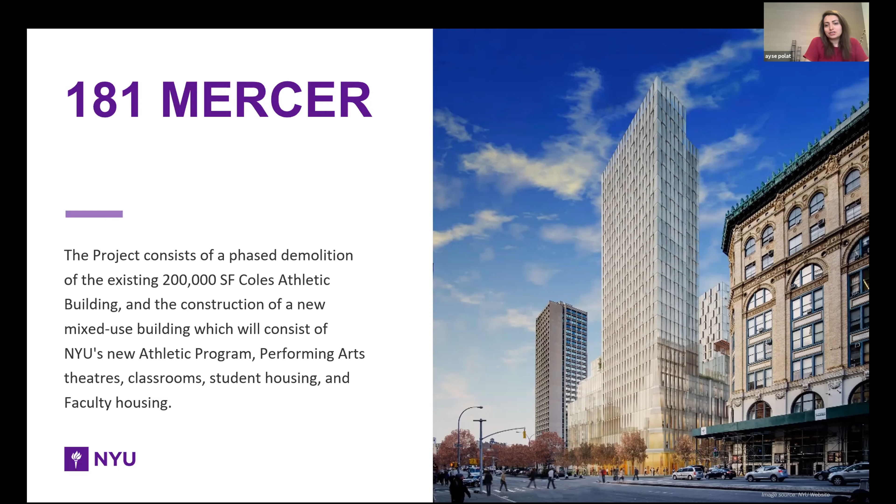So let's talk about NYU Mercer. It's a very unique project because of its scale and location in the heart of NYU. The project consists of a phased demolition of the existing Coles Athletic Building and the construction of a new mixed-use building, which will include some athletic programs, performing arts, theater, classrooms, and student and faculty housing.

So currently in 2020, work performed was very busy: structural steel, precast planks, cast-in-place concrete, a lot of completion of spray-on fireproofing, curtain wall installation, and delivery of major MEP equipment. It was really a very busy year for the project in 2020.

So some metrics from the project. As I mentioned before, it's a large scale project. It's a mixed-use academic building, 750,000 square feet, 23 floors. Area per floor varies according to podium and towers, and it's a GMP contract type, guaranteed maximum price.

It was really exciting to work with all these different companies and learn their expertise in their specific fields. We spent a good amount of time with a select few of them during the BIM process and doing coordination of this building—a lot of time with the architects, Davis Brody, Kieran Timberlake, and the MEP engineers over at BR+A. They were integral to this whole process, and I like to think that we showed them the Turner way to coordinate a building, so hopefully they take some of these procedures and skills to their next project.

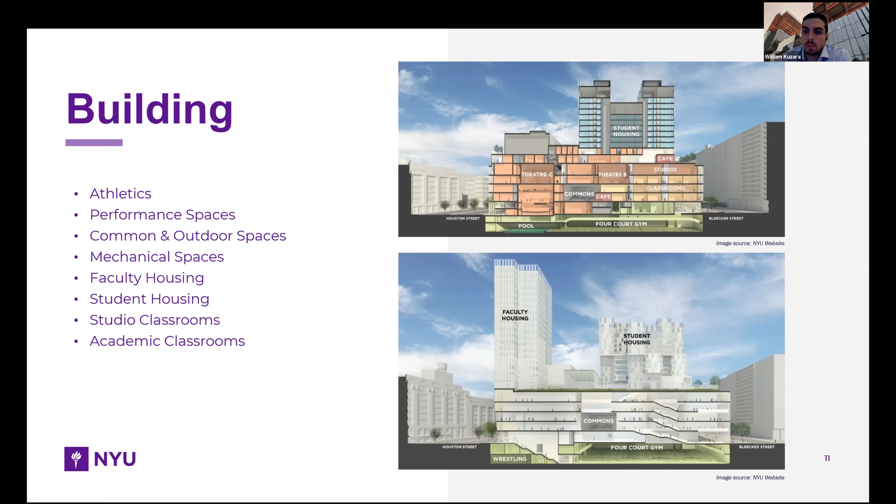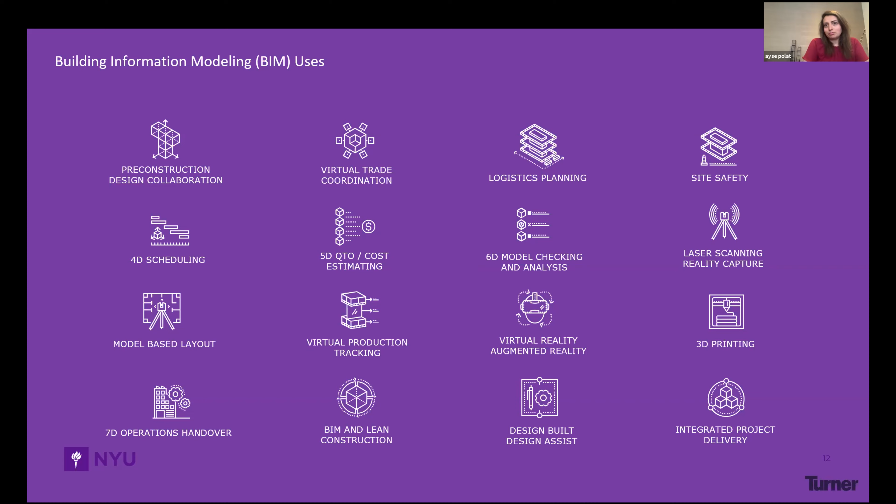So let's talk about the BIM part of the project. Of course, the project is very large scale, with a lot of mixed uses. In any building information modeling, BIM uses can be performed on a construction site, and these technologies are, year by year, increasing and advancing. So you see some of the BIM uses that we currently have on the screen.

On typical job sites, some or most of these are being used. But for this project, we actually did virtual trade coordination, logistics and safety planning, 5D, 6D, laser scanning, model-based layout, virtual production tracking, 3D printing, and lean and BIM integration. In the following slides, you will see samples of these, and these BIM uses are actively used in the project currently.

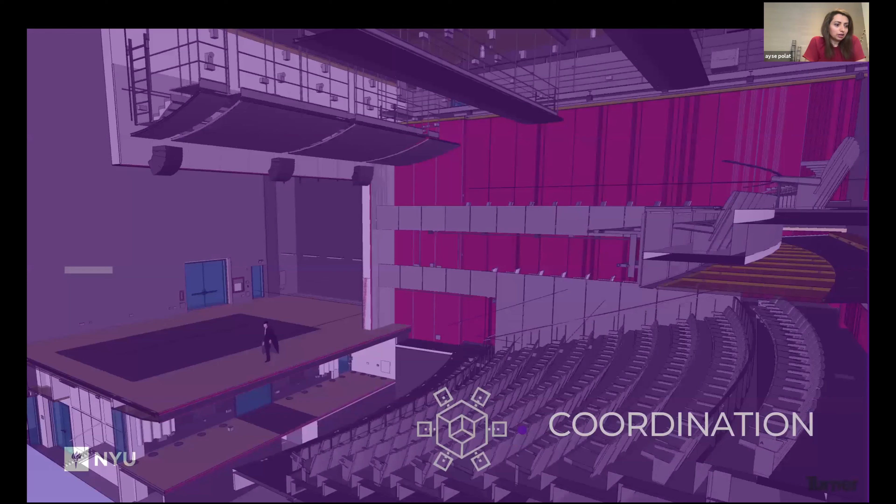We will start first with coordination, because coordination is probably one of the most important BIM activities on the construction site. Bill, since he has been involved with the project since the beginning, will explain the coordination setup. But first, Sal is going to mention how the coordination was set up contractually and in the BIM execution plan.

Okay, I'll go through a few of the things we did prior to coordination and setting up for the project. There's many facets to setting up BIM on a project. Initially, we usually start off with a BIM execution plan, which we did on this project, and we meet with the project team. We discuss the project, learn about it, and decide as a team what uses we want to implement on the job.

From there, we'll start getting into setting up contracts with subcontractors. You can also refer to them as requirements for the subcontractors. We want to ensure the subcontractors give us the deliverables required for the project. It's also a way to hold subcontractors accountable. This is put into their contracts, and it's something that's owed to us, so we're very diligent on that portion.

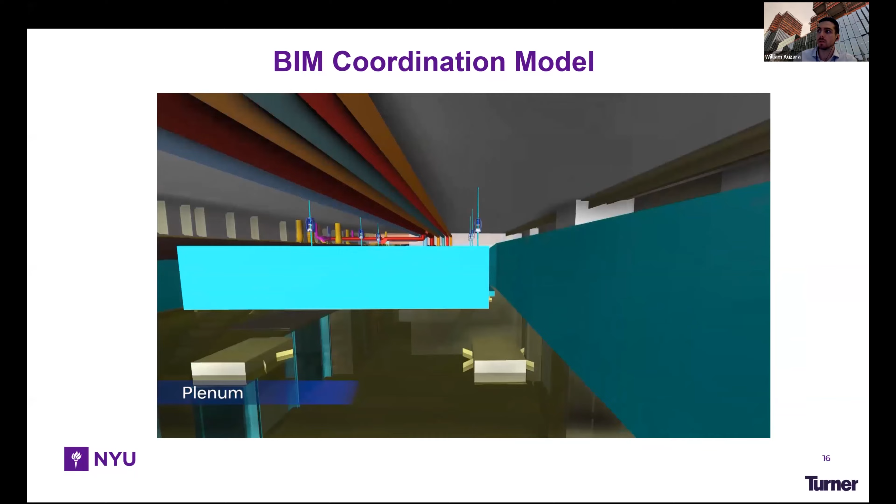Thank you, Sal. Schedule is very critical to BIM coordination. We basically need to be ready to build the building when out in the field is ready for us to install the MEPs. So the video you're seeing on screen is a walkthrough of a live coordination model after we finished coordinating it. This is the final product of BIM coordination, where we put together the building in 3D before we actually build it, so that it's buildable in a timely manner when we get to the field.

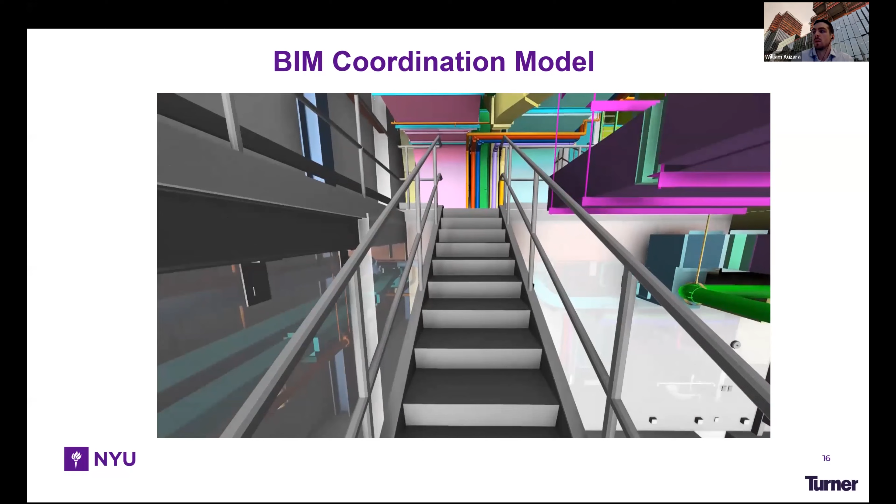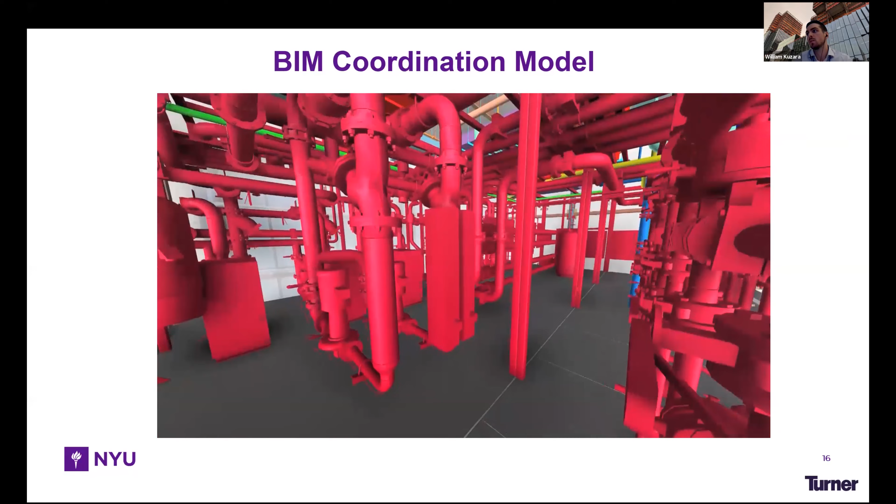One of my favorite things about BIM and utilizing it as a tool is it really makes me feel like a superhero, because it gives me X-ray vision. I can see through walls, change through colors, walk through walls, and really get a feel for how the building is going to be built when it's done, and also how it gets put together. I'm going to let this video loop and start it over, walking you through the specifics - this is on the south side of the building.

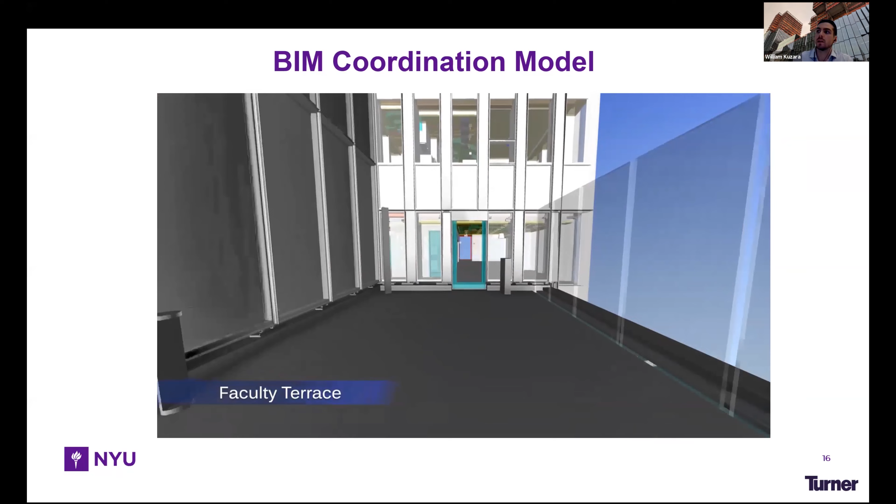There's a terrace for the faculty housing. It's really cool that you get to see, pop your head above the ceiling, what you're not going to see when the space is finished.

So it takes us a lot of time to really make sure everything's fitting and we can build it without hitting each other once we're out in the field.

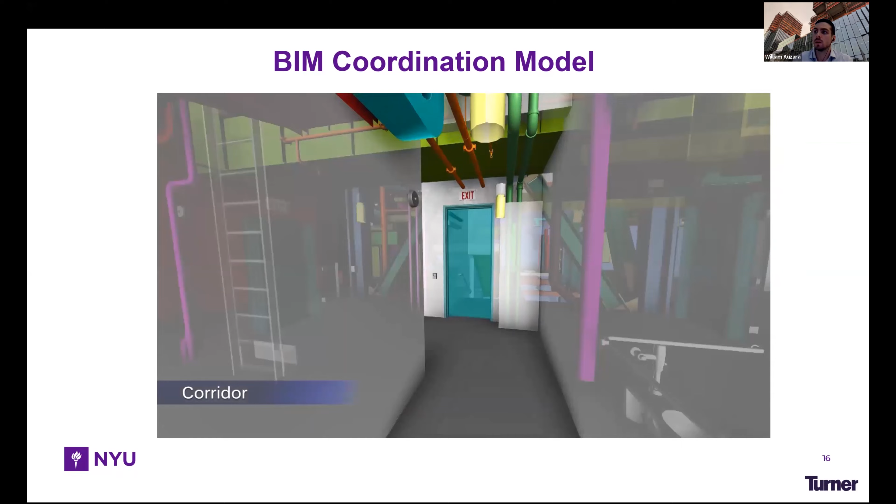So this is more of a finished space, but then we walk into a back of house area where our mechanical room, one of our biggest mechanical rooms on the job, is. We're actually building this out in the field right now, and we really used BIM to put this together in 3D before we build it.

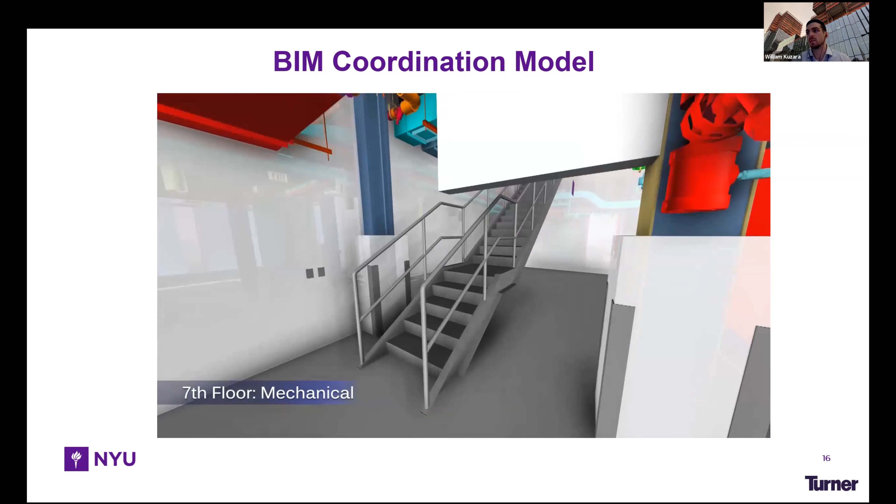You can see it's a very complex space with a lot of layers. It took a lot of time to figure out where everything was going.

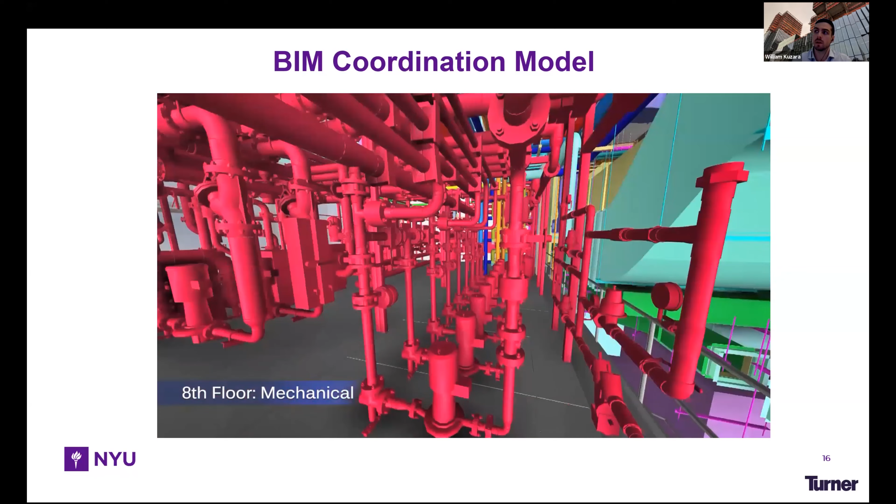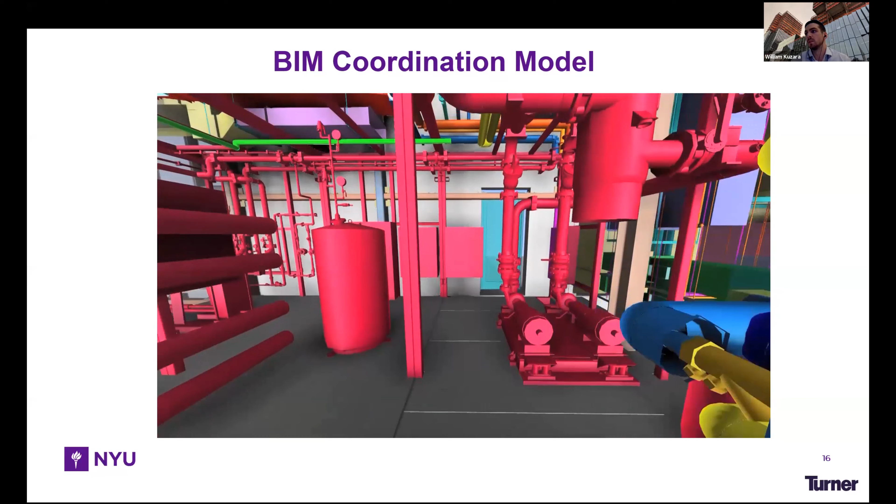One of the most important parts of this mechanical room is this prefabricated mechanical skid. Everything in red you're seeing was shipped to the site in just 3 pieces, 3 large pieces that were picked by the crane and set onto this mezzanine here. So it was a highlight of our MEP systems, that prefabricated skid.

So this next slide is kind of the other side of the coordination coin, whereas the first video was a typical MEP coordination mechanical room. The video looping now is an example of one of the many unique and challenging coordination spaces of NYU Mercer, this being the biggest theater, the proscenium theater on the job.

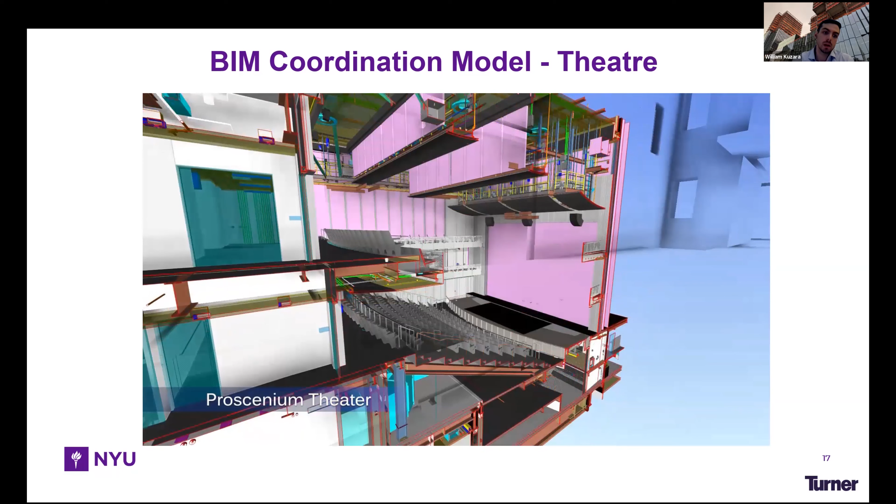What's important to highlight about this space is we didn't just have our standard MEP coordination, but we had a lot of high-end finishes from the millwork side, the architectural side, the theater rigging side, and the AV side. So there's a lot more than just your standard MEP coordination in these spaces.

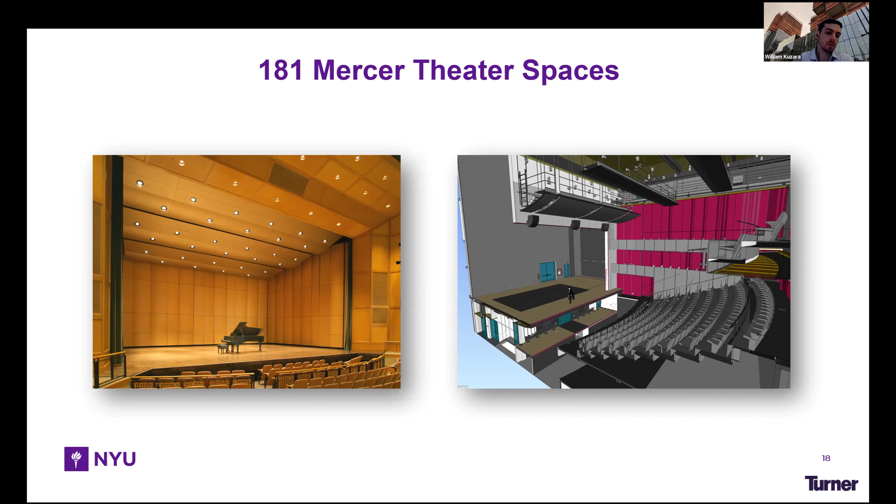So when you're coordinating a space you're not familiar with, you have to reach out to all your resources available to make sure you're coordinating it correctly, so you understand what it's actually going to look like and how it gets built.

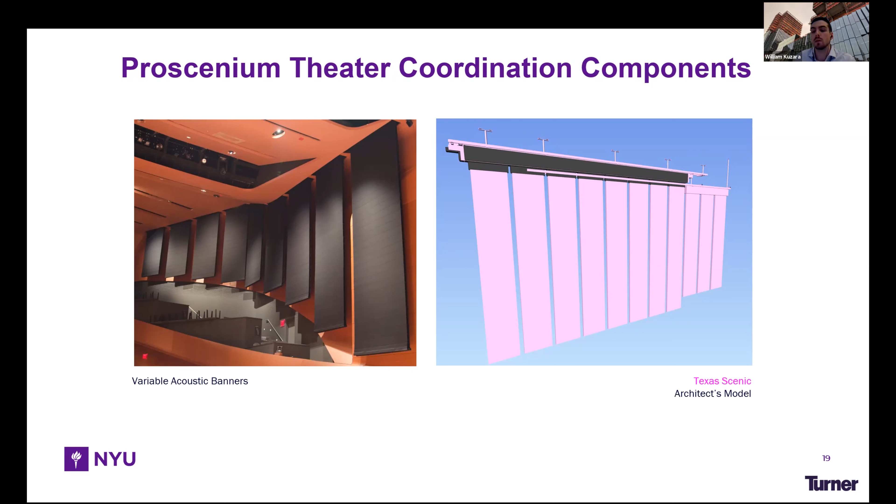What you see in pink is basically what's being fabricated and installed in one of our theaters. It was challenging because we had to rely on our subcontractor to explain and provide a detailed model of not only what the housing looked like, but all the supports and what it was actually going to look like when deployed, to make sure we were clear of everything around these acoustic banners.

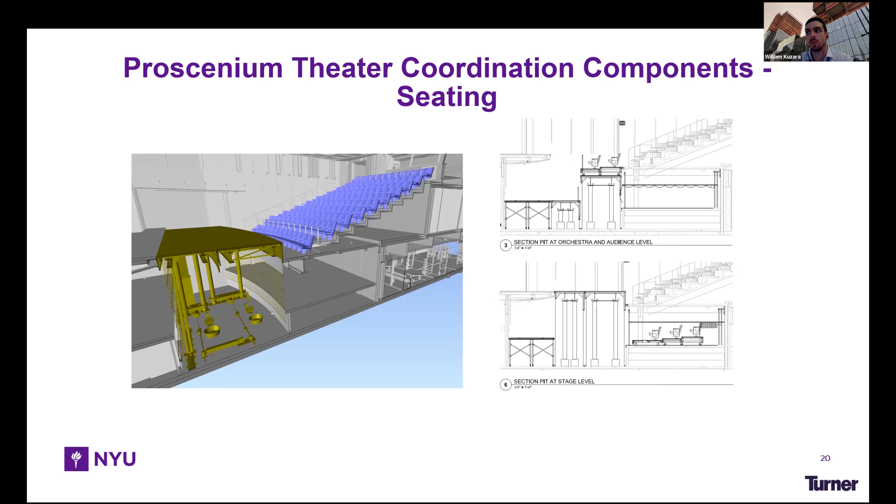We got the model on the left from our subcontractor, and he was able to put it into the model. It's a very detailed model that really helped me understand how things moved around and make sure we were allocating enough space for this lift to go in.

One of the more challenging parts of the big theater was the overall seating rake, where we have the majority of the seats. It's a sealed concrete plenum, a mechanical plenum, so underneath we have a large system of ductwork pumping air into basically an open void. Under most seats there's a cylindrical air diffuser that slowly diffuses the conditioned air from below up to under your seat without your noticing it.

One thing we used BIM to coordinate heavily in this area was pulling all the different models together to see the whole picture: the seating location, the diffuser locations, the structural standpoint with the support steel below, and the masonry walls forming our concrete plenum on the sides. The coordination model was really a tool for us to see everything in one spot and make any adjustments required due to conflicts with steel or how we were fitting in the electrical devices for the seating lights. It was the best place for us to bring everything together and look at it as an entire picture.

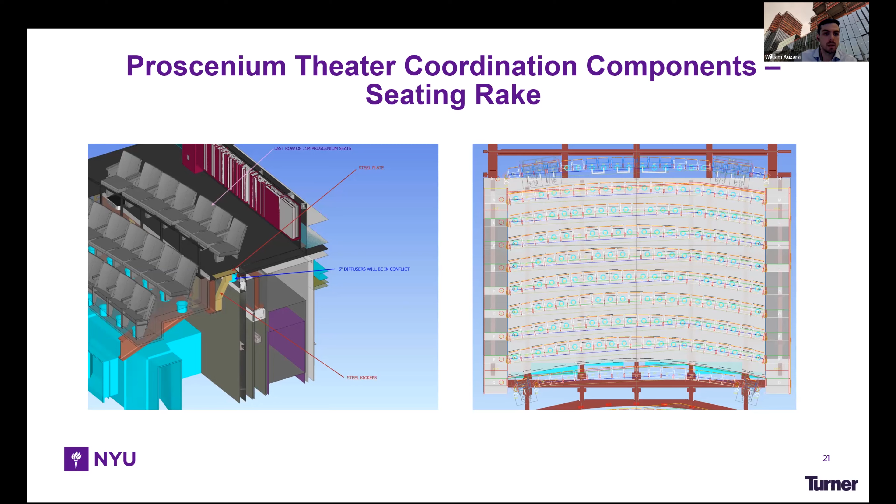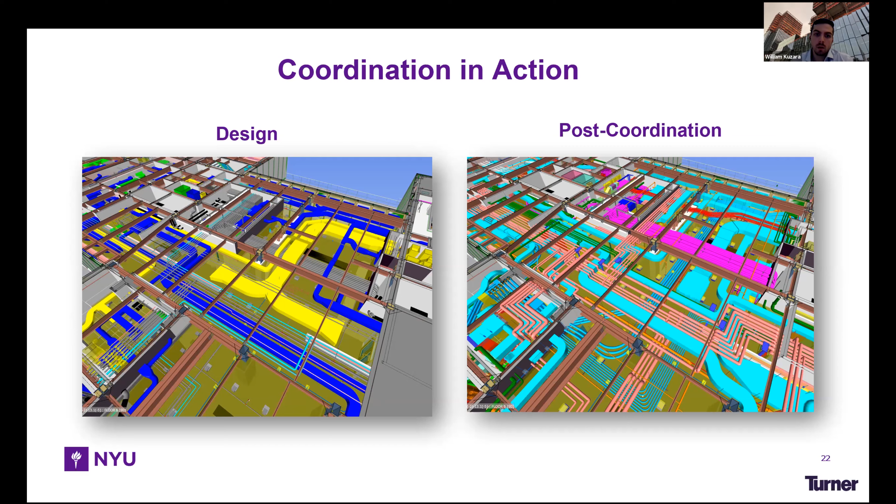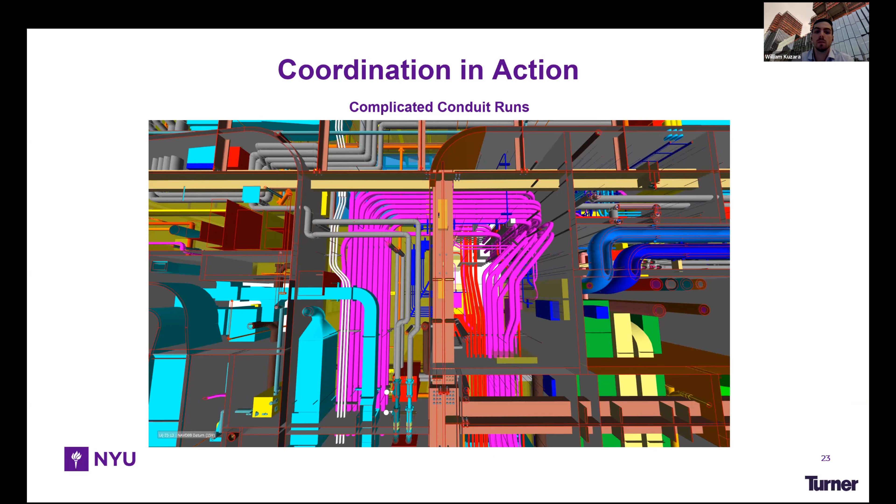Next slide. The next few images are just quick snapshots of how complicated some of our spaces are at 181 Mercer. There's a lot of layers, especially for the first 6 floors of the building. They're relatively tall with high ceiling plenums, especially on the 5th floor, where we have a ton of layers of MEPs overhead.

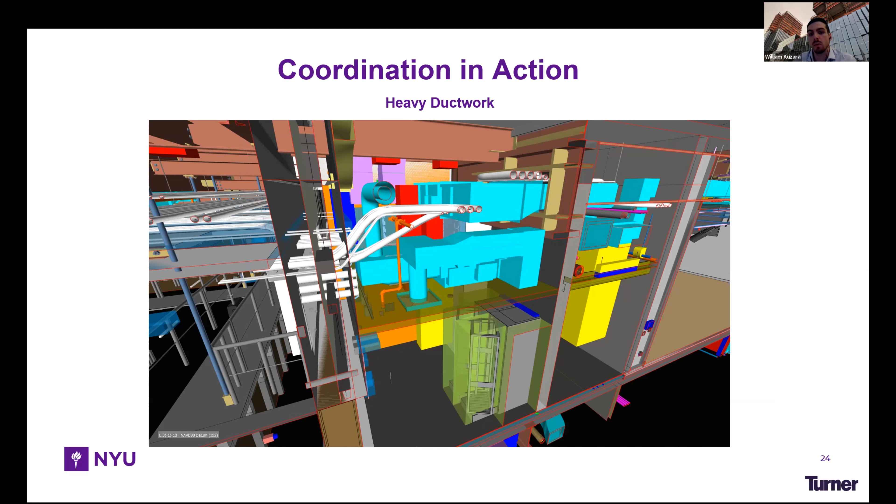What I wanted to highlight in this image is we don't only draw and coordinate the physical system where it's ductwork, piping, or conduit — we actually maintain access zones, which you can see here as the yellow and red boxes. We need to simulate and account for future maintenance or any type of future access a human being will need to physically get up above a ceiling and either change filters or perform maintenance on equipment. So we draw those zones simulating access in our coordination model, and provide space for those activities to happen.

Best practices — this is a high conceptual level thing for coordination, without going into the details of exactly what we did at NYU Mercer. What it basically comes down to is collaboration and keeping communication lines open. That's not limited to just talking to your subcontractors and then taking that information to the owner or design consultants — it's bringing everyone together in the same room so no one's working in a vacuum. What we found to be really successful at NYU Mercer was weekly meetings, not just one-on-one with subcontractors, but bringing everyone into the same room to understand both the design intent from the design professional side and any constraints, whether constructability or manufacturing, from the subcontracting side. Getting everyone in the same room to look at the issues at hand and understand where everyone is coming from to move past certain issues was super important.

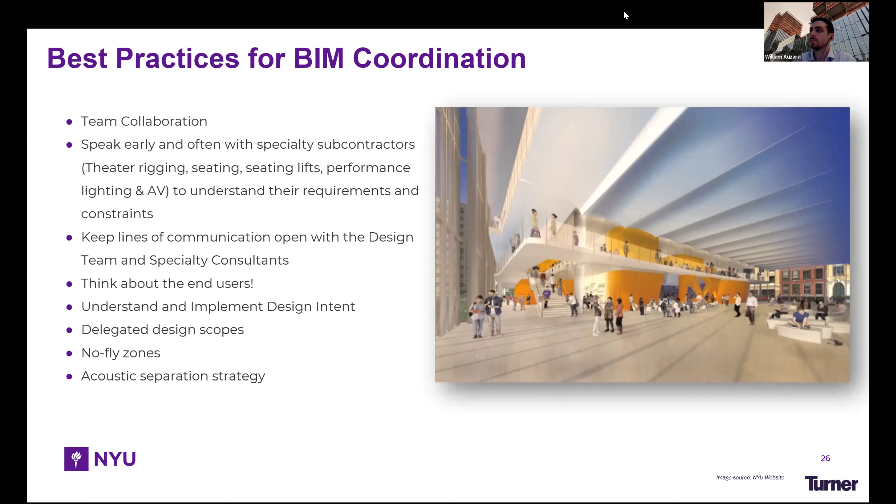Thanks, Bill. This was a lot of insight from coordination. Yeah, ran through that pretty quick. Yeah, which is very important for the project.

Another important part of BIM processes is when we use BIM tools for site safety plans and logistics. This project is in the heart of Manhattan, and a lot of projects have logistical site safety related challenges, as does this one. So we developed the site safety plans in 3D. As you may know, the Department of Buildings requires an official site safety plan submission for major projects, for the plan examiners to review the site safety logistics and related permits.

So we did the same process in-house. We generated 3D site safety logistics plans and shared those 3D models, drawings, and all the permit-related submission requirements with DOB for approval. Those are the samples you see from the original submission.

Of course, this project had unique challenges, the complexity and location of it, unique challenges for logistics, as well as being in a residential area. So we used high acoustical fencing around the site, and made sure we had 20 foot high sidewalk bridges, because public protection and public safety is our first priority for every project, as well as for the Department of Buildings. Those were very important aspects of the site logistics.

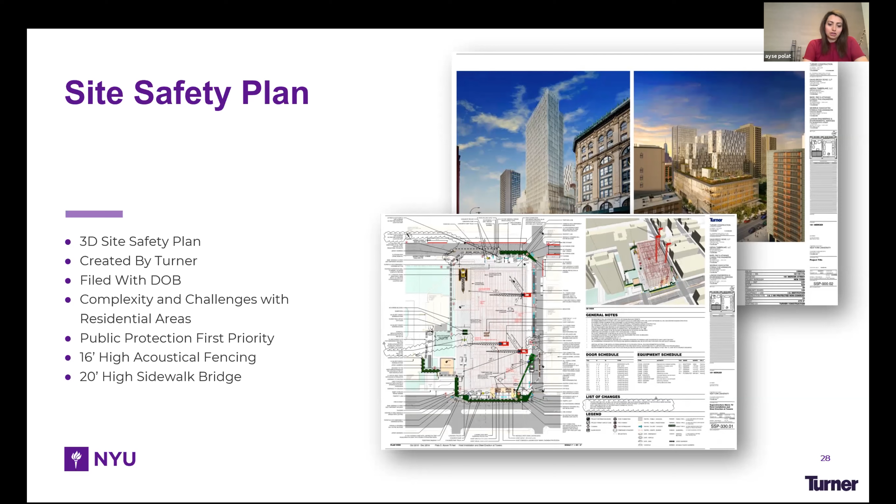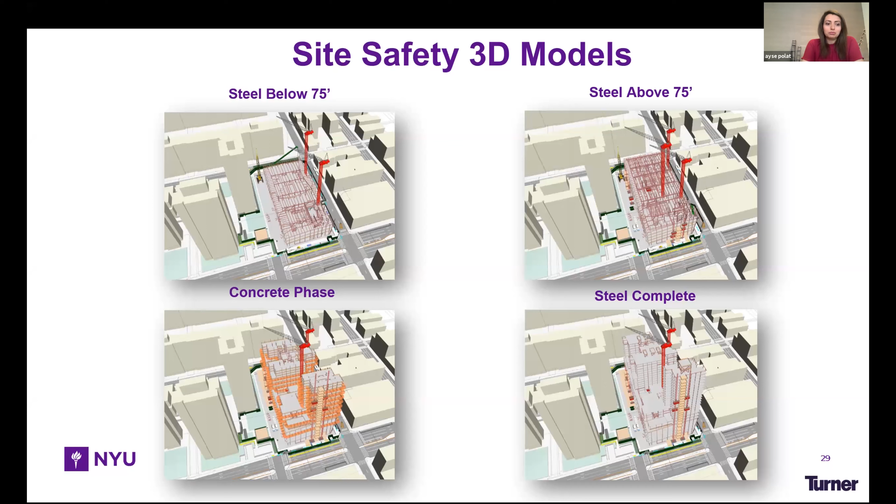I always say that site safety logistics are actually storytelling. As an architect by background, I never knew how important site safety logistics were for construction, because it tells the story of how we actually build the building - where the cranes are going to be located, where the hoists are going to be. Every piece has a certain phase and timeline in order to achieve successful site safety.

Another challenge, like the rest of the construction and design industry, was facing COVID-19 challenges during 2020 and ongoing into 2021. The site followed all CDC and state guidelines. We added additional hand washing and sanitizer stations throughout the project, and modified shanty areas - I believe that was a brilliant idea because we had more open spaces for workers to get their lunch breaks with changed time frames, so they could have a better, protected environment.

Also daily temperature checks, COVID-19 testing, and social distancing was one of the most important things we tried to ensure. Partitions in the site offices were another precaution we took, along with partitions between desks, limited conference room access, certain directional walkways, and as everybody knows, increased virtual meetings like we live with online right now. Those are pretty standard prevention techniques we took during the COVID-19 pandemic, and currently we are still following the same guidelines and rules and regulations.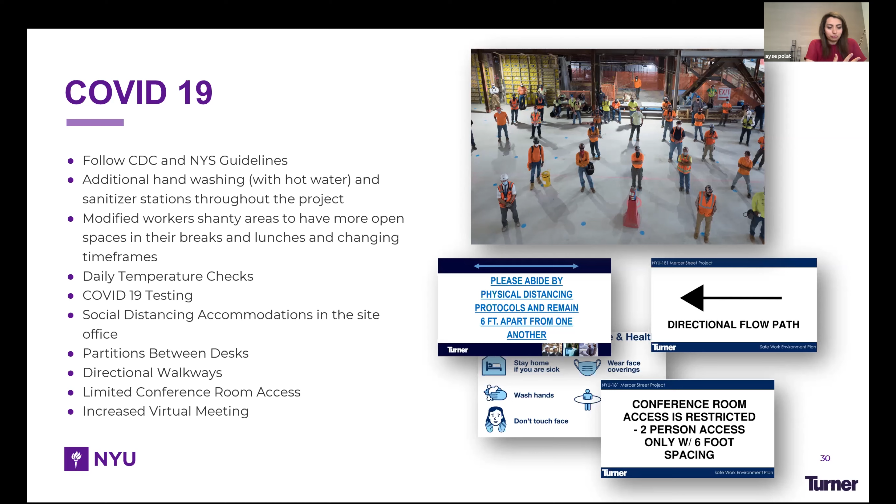You want to talk about this, Bill?

Backing up a bit to the logistics end of it, we use BIM a lot for logistics planning, not just for coordination of how things are going to look when they're in place, but how we get them into the building.

So I had to perform this study pretty quickly to communicate our plan to our rigging contractor, to show them exactly how we were planning on bringing these 5 pieces into the building and how it was going to traverse the building with certain pieces of steel already in place.

We used it to really understand the sequence — it's like, oh, we had to leave a certain piece of steel out to be able to fit this in. We used this tool to communicate the overall plan without actually having to walk outside the building and through the spaces. It was kind of a bird's eye view of what we wanted to do.

So we turned this over to the rigging contractor. They then produced their engineering drawings and all the reports, and gave it back to us, and it worked out pretty well.

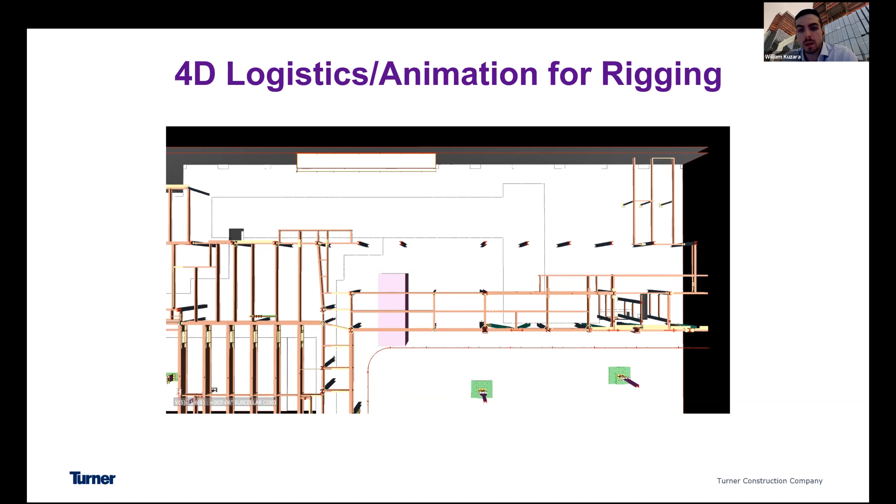Did the video play? It was kind of slow. Yeah, I think it's— oh, sorry. Let's talk about the tracking maybe. Sorry, okay, oops, yeah, let's back up. Okay, so yeah, you can play the next video.

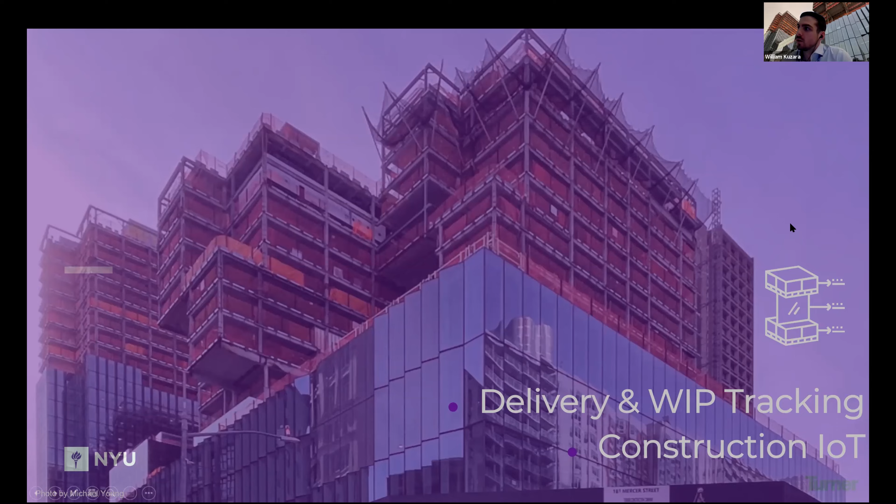Sure. So after we coordinate and have these models that represent what's being built, and we've used them to plan how we get it in place, the next big step in using BIM on a project of this size is seeing how the building is getting built as it's being built.

One of the tools we're using at NYU Mercer is an Autodesk product called Assemble, which essentially takes our coordinated models and allows us to highlight, or assign statuses and data to certain pieces in the model, to help us visualize the work that's actually being put in place and how and when it's being put in place.

So it's a step forward from conventional techniques of tracking work in place via highlighted drawings by hand or electronically, or some combination of spreadsheets and other tracking mechanisms in Excel. These new tools allow us to use the coordinated models and visualize the building in 3D space and see what pieces are going in at what time.

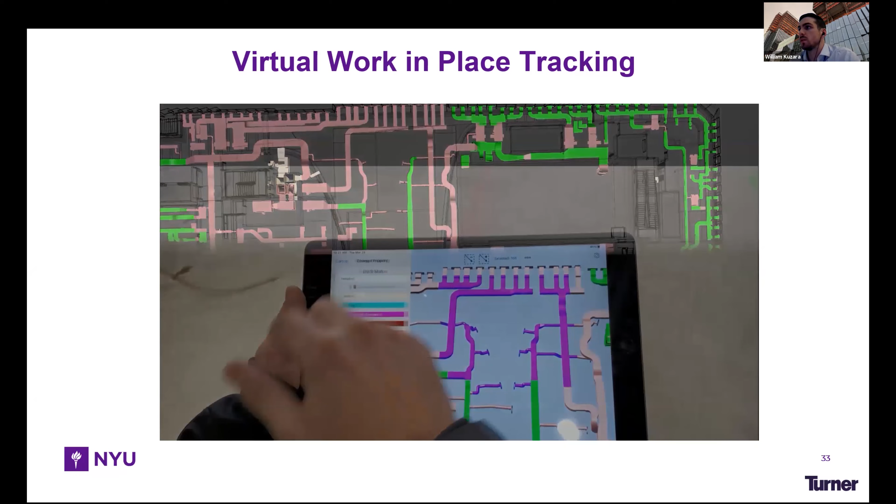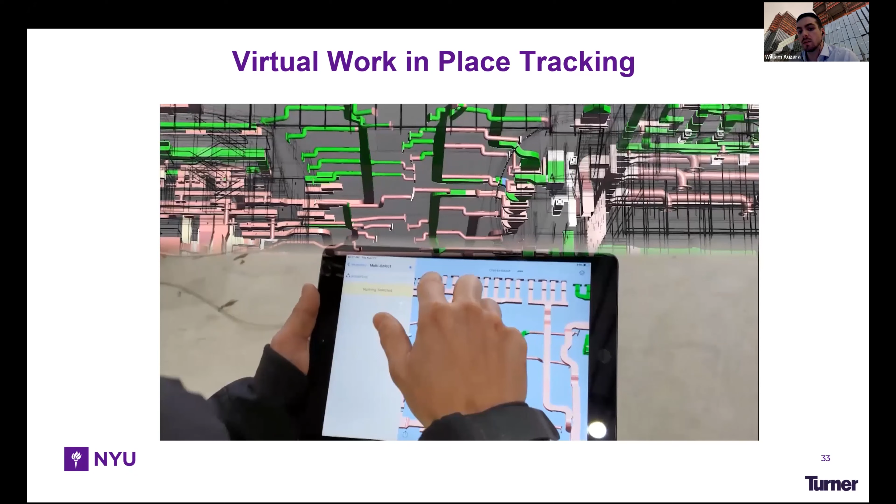So it's a tool we can use both on the computer and in the field, as you can see on the iPad, and it lets us track and collect data to see how the building is getting put together without actually walking the space. You can see a lot more information in a shorter amount of time.

If you go to the next video — we're using it for a lot of trades on this building, mostly our mechanicals, and the other big one is our curtain wall, so we have a curtain wall tracking model in this tool. This video gives an overview of what the tracking model looks like and how the information is getting put in, but also the reporting end of it and how people are digesting and using this information.

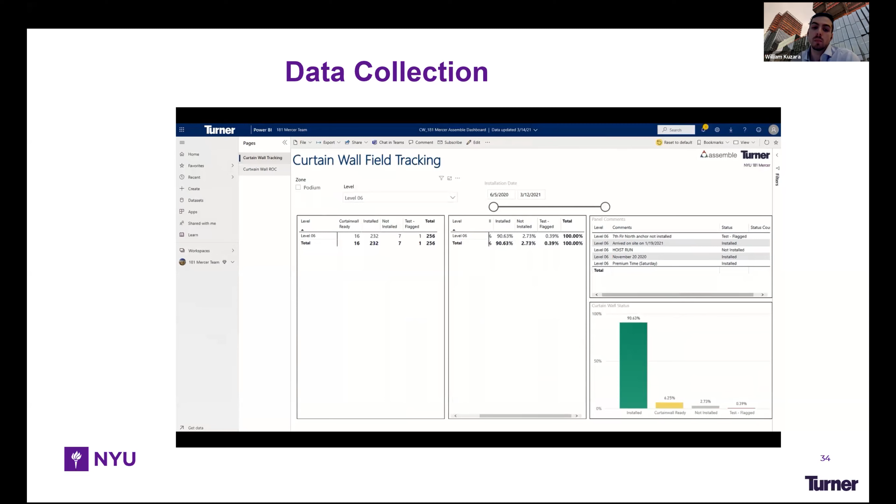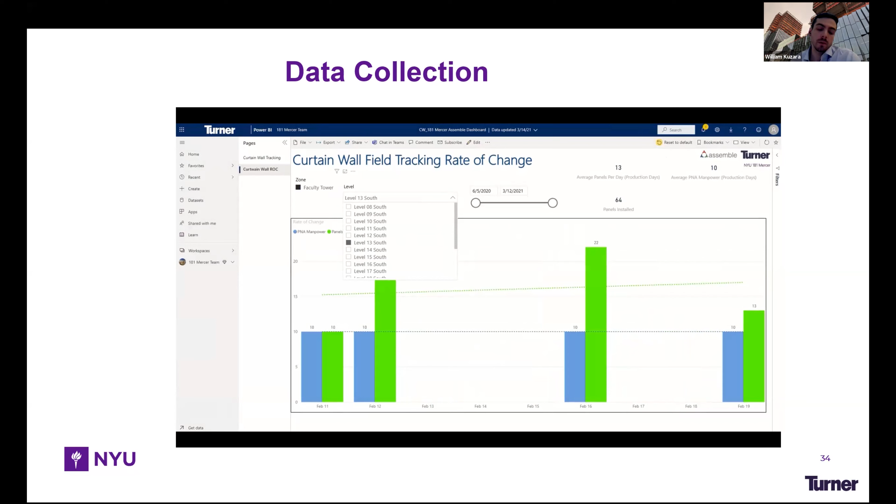All the data that gets put into Assemble is linked to another system that everyone on the project team has access to, and it's a live data refresh — as soon as the model is put into Assemble, we see it on the reporting end. So the project team can look into these dashboards every day to see how work is progressing, see if there are any problems being flagged in the field, and see if any decisions need to be made about changing our schedule, our angle of attack, or how many problems we might be having with certain pieces. It's just a tool to centralize the information and use it to make decisions.